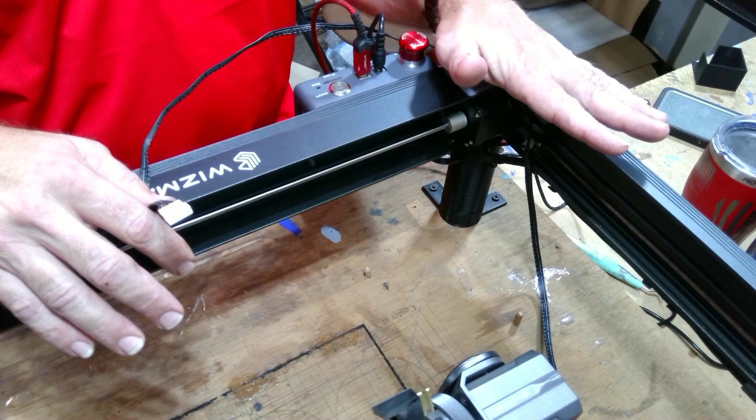Okay, so plugging in the rotary chuck is pretty simple with this. Here's our cord off of our rotary, it's got this plug on it. All we're gonna do is this little stepper motor right here - down in the bottom of that is the power plug for that. We're just gonna unplug that, and then we're gonna go over here and plug our rotary into that. Now what'll happen is the laser module will go back and forth, and then the chuck will turn on the rotary, back and forth, however. So pretty easy, that's all there is as far as installing this thing. So let's move over to Lightburn and get all our settings in there and we'll get this thing going.

Okay, so this too is pretty simple, there's not a whole lot to this. So what I'm gonna do is, once I've got Lightburn open, I'm gonna come down here to my lasers and select the Wizmaker - that's the laser I want to use. Now, once that is selected, I'm going to come up to laser tools in the top left, right up here. I'm going to select laser tools and go to my rotary setup. So from here, you can choose either you're using a rotary roller or a rotary chuck. Since we're setting up our chuck, this is what we're going to do today.

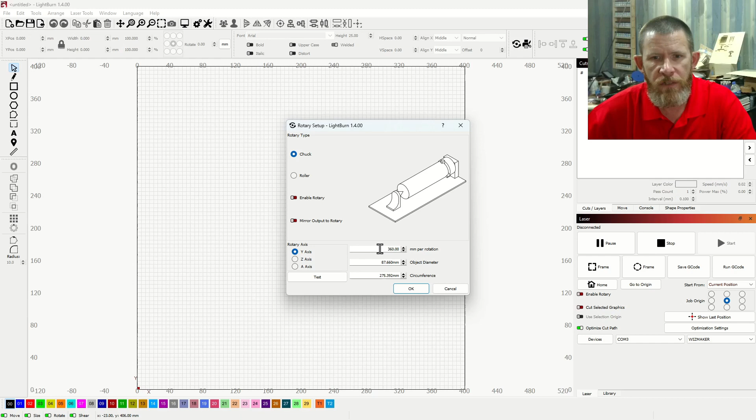So you'll see the default, at least in mine, when I go to set this up, my millimeters per rotation. This is the info you need that's going to tell Lightburn how much that rotary is going to turn to do one rotation. So 360 millimeters is what the default is when I open mine up. So what I did is I went in the book that came with the chuck and the rollers, and it told me that it was 160 - so the Wizmaker chuck is 160. All I'm going to do is type 160 in there, dot, and enter. Now I can bring that back up and it shows me 160 millimeters per rotation. So now the size of my chuck is all set and good to go.

The only other thing you're going to have to do when you're doing the chuck is you're going to have to tell Lightburn how big a diameter what your etching is.

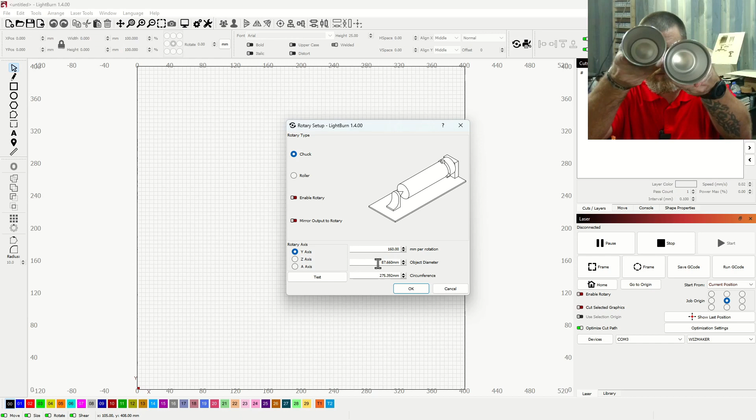So there's a difference. These two mugs - obviously the blue one is smaller than the red one, and it's shaped a little different. So the diameter on this is going to be smaller than this one. I want to make sure that anytime I'm burning or etching one, I put the right diameter in for that mug. And if I switch to a different one, I've got to remember to switch that diameter too.

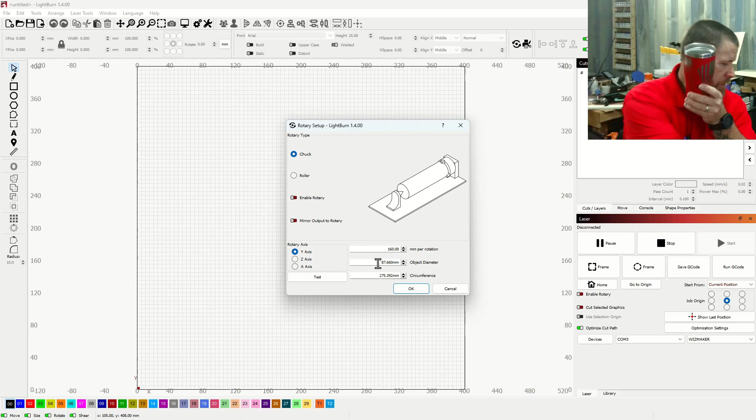So what I'm going to do is take this mug and a set of digital calipers. They don't have to be digital - if you don't have digital, regular ones will do. I just like digital because I use these for work.

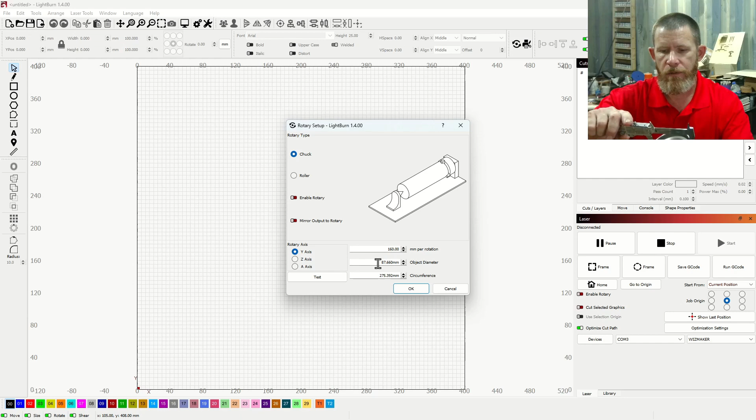I'm going to measure the widest distance on this tumbler, which tells me what to go around. It's tight right there. 87.43 is what I'm getting. So that's what I need to put right here - 87.43.

Now that's set. I don't need to worry about circumference, because once I put the diameter in there, it automatically changes the circumference.

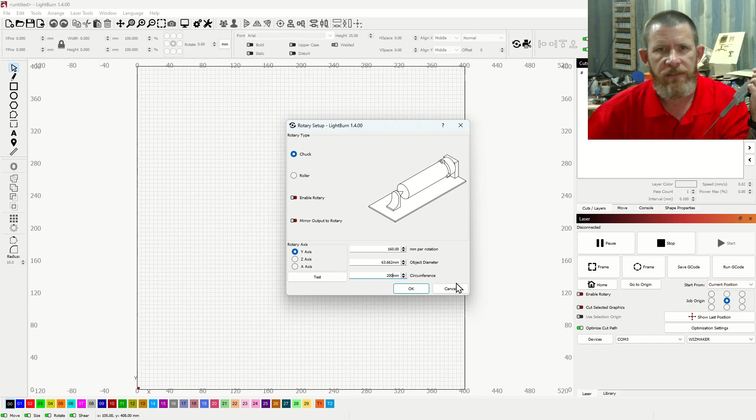I'm going to copy that setting with Control C. If you watch the circumference down here, if I change this to 100, it automatically changes the circumference - so you don't have to set both, just one or the other. Vice versa, if I know the circumference is 200, that tells me 63.662 millimeters is my diameter. So it does the math for you.

That's pretty simple. So I'm going to go back here and paste that setting back in, 87.43, and just hit OK.

So now it's set. But the only other thing you've got to look out for is if you have multiple lasers and you're going back and forth with different brands - say two X-Tool D1 10-watts, you don't have to worry about this. But if you have an X-Tool and a Wizmaker, or a Wizmaker and a laser tree, now you've got to go in on Lightburn.

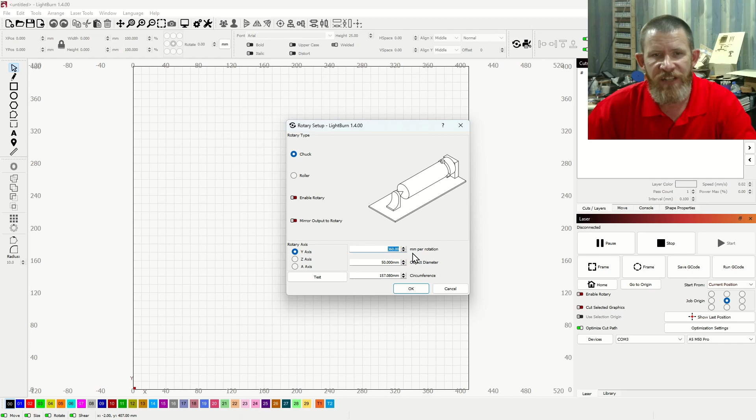You can see down here where I have Wizmaker selected in the bottom right - you see I have other lasers in this one. So if I go to my A5 M50 Pro, now I go back up to laser tools and go to rotary setup - see there, 360. It doesn't change it for every laser. So if you're going to use this on different lasers, you need to go into each laser and set that 160 millimeters per rotation and click enter.

That's it, that's done. Now the only thing you've got to do is go in and change the diameter or the circumference, whichever one you want. So that's it - it's completely set up.

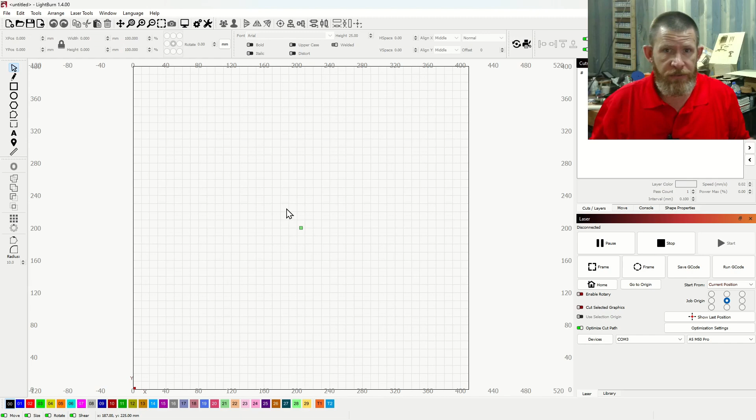So that's the difference. If you don't have it set up properly, and you put in a picture or words, they're all going to come out looking really goofy, and you're going to waste a tumbler. So anyway, that's how you set that up.

So let's move over to the laser. We're going to fire this thing off and do a speed power test with air and without air on a blue and a red tumbler. Then we're going to etch a flag into a blue and a red tumbler, clean those up, and see what it looks like. It's pretty simple. Stick around.

Okay, so I'm not going to bore you guys with a bunch of video of doing speed and power tests - everybody should know how to do that. If you haven't, I have videos on running speed and power tests, but there's no sense running a bunch of video on that. So we're going to get right to it.

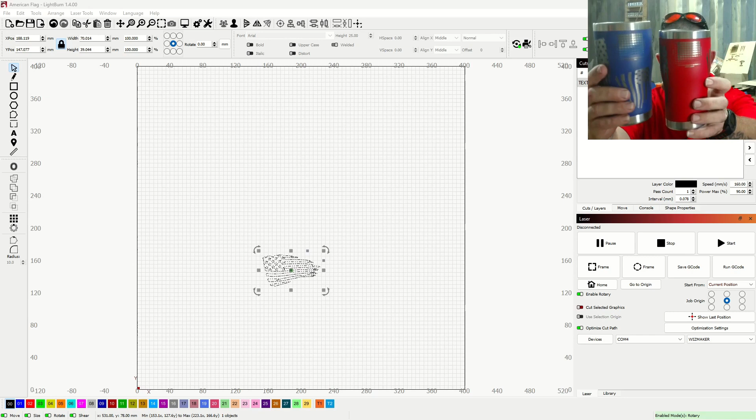So you can see here, I ran my red and blue tumblers - I've done speed and power tests with and without air. And then what I did is I went through and just did a little flag. Okay.

So there we go, pretty simple, not a whole lot to it. I did red and blue, got different speeds and powers between them, but that's the whole purpose of running the speed and power test. They both clean up pretty easy, just a little bit of scrubbing with the melamine sponge. You don't need a bunch of fancy chemicals. Water, melamine sponge, and Bob's your uncle, you're all done.

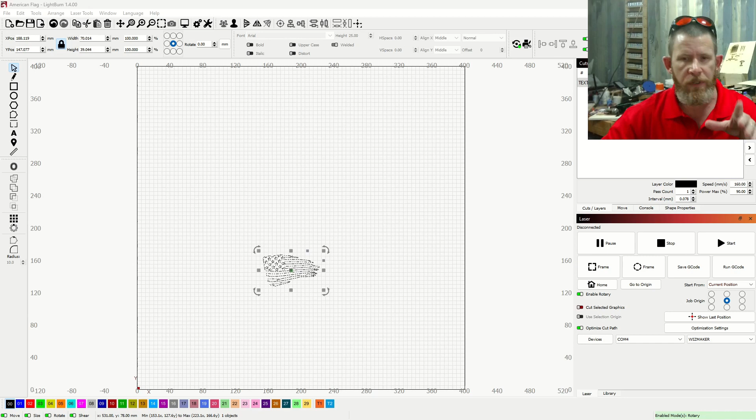So here's what we're going to do. I want to take another tumbler, just a bare one. Now what I want to do is put that flag on both sides, but when I'm drinking out of it, I want the flag to be in the proper position no matter which way you're looking at it. So if I do it this way and go to drink out of it, the flag's upside down. I was just trying to burn it, wasn't trying to do this - this is not a finished product, this is a test piece.

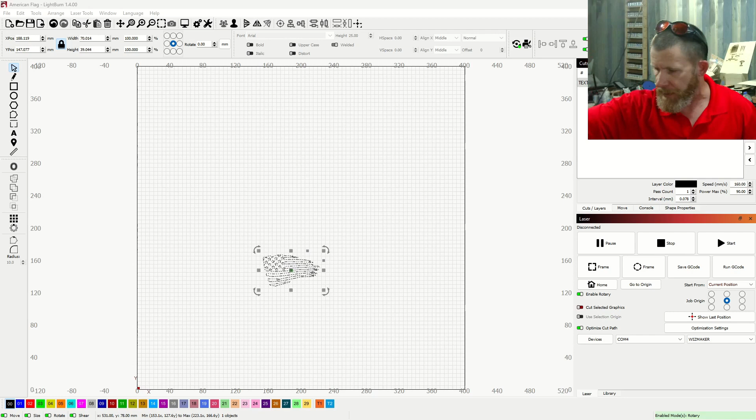So now what I want to do is make a couple of rectangles inside of LightBurn, and then put my flags in there. The purpose of doing those rectangles is one is going to be one half of the mug, and the other rectangle is going to be the other half of the mug. So here's how I'm going to find that out.

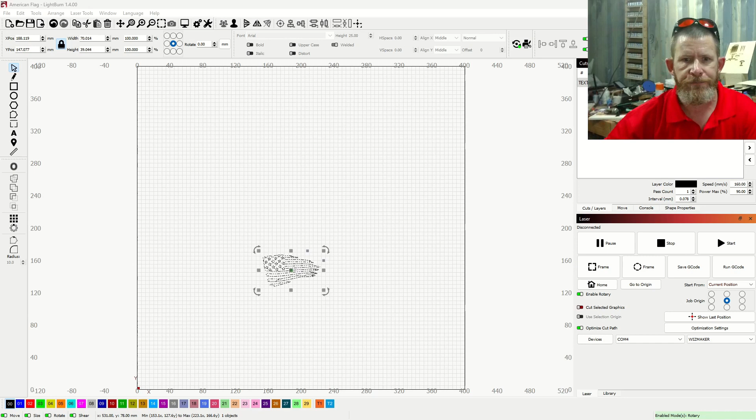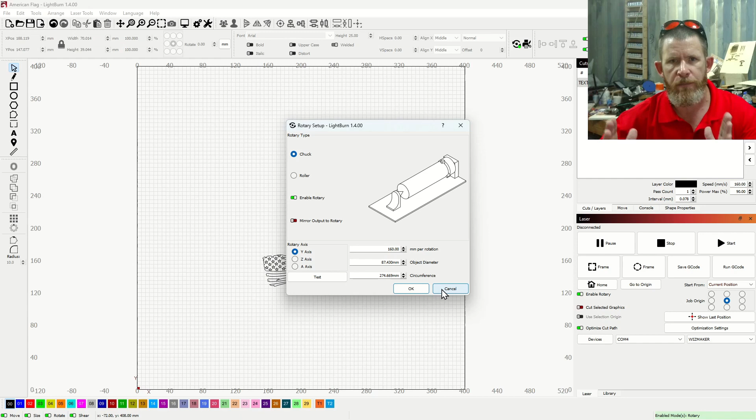So what I did is I went back up to laser tools and went to rotary setup. I looked down here at the circumference: 274.669 millimeters. Basically what I did is round that 0.669 up to 670, which isn't going to make much of a difference, so I used 274.67 millimeters. Then I divided that in half and got 137.335 millimeters - that's the width I want for two rectangles.

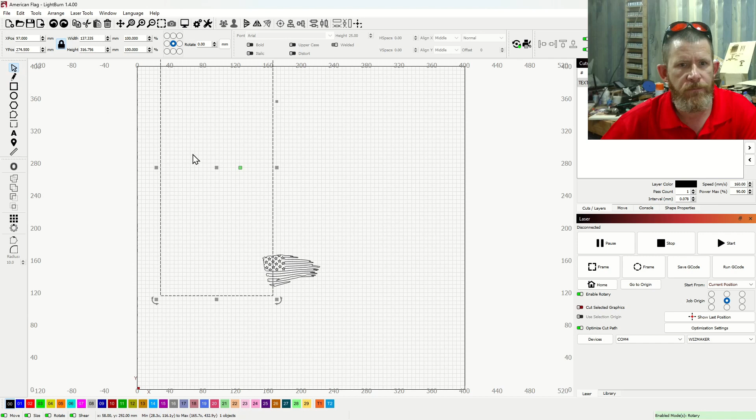So I've got this information, I'm just going to hit cancel and come up here and draw a rectangle. My width I want to be 137.335. Enter. Okay, now it's a little big but that's okay because we're going to adjust that. Whoops, Control Z to undo that. So I'm going to drag this down a little bit.

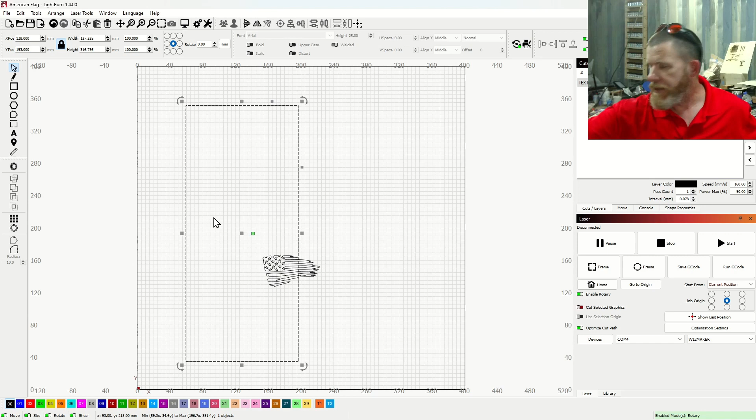Now what I want to do is measure the coated area on my tumbler. I'm going to grab my ruler - 142. I really like the flag that I did earlier and it's about 120, so that's what we're going to do - we're going to make this 142. I'm going to unlock and my height is going to be 142.0. Enter.

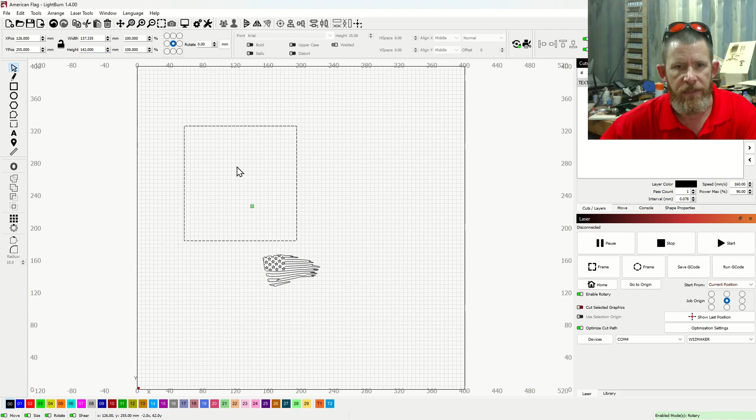Now I'm going to take that, hit Control C, copy it, and then paste it. Whoops, Control C, Control V. There we go.

You can do this with Array if you want as well, and sometimes it's better because my mouse is a little touchy - if I hit the arrow it moves over way too much. But that's okay, I'm aligned down here on the bottom. This little tiny 0.001 millimeter section is not going to bother me a whole lot.

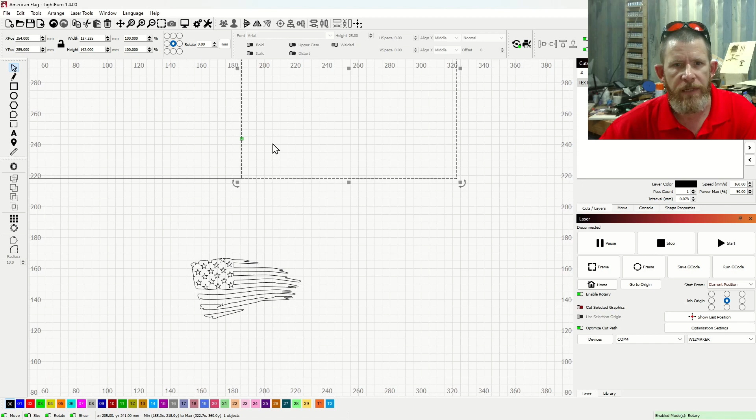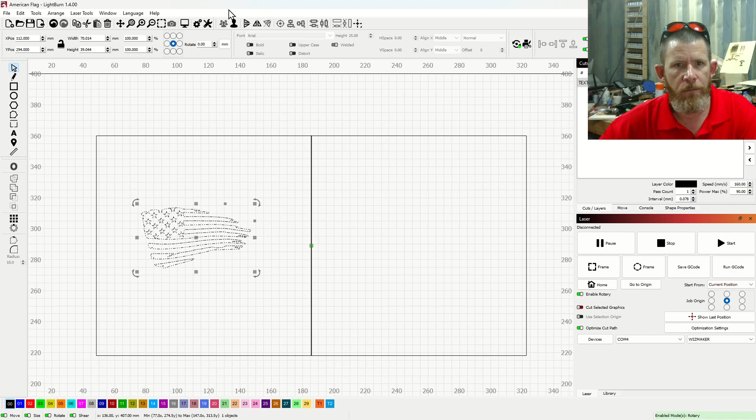Now what I want to do is take this flag and bring it up here. Now what I'm going to do here is rotate that 90 degrees.

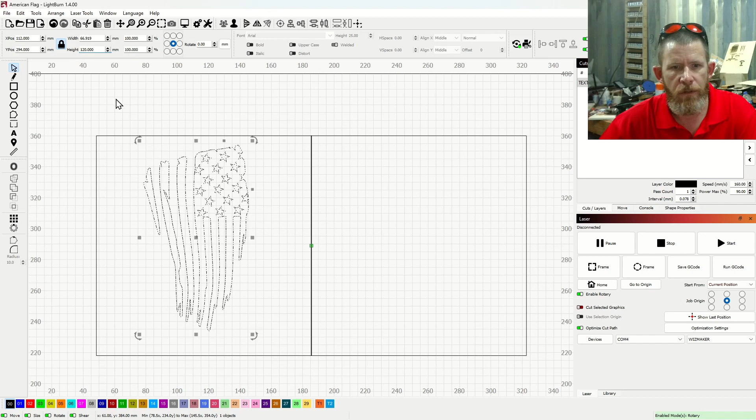So that's going to be one side of the cup. And I'm going to lock the height on this - my height on the other cup I did was the right size, the size I want was 120 millimeters. So right there. Now what I'm going to do is take these and align that vertically, and I want to align it horizontally - that way I know it's in the center.

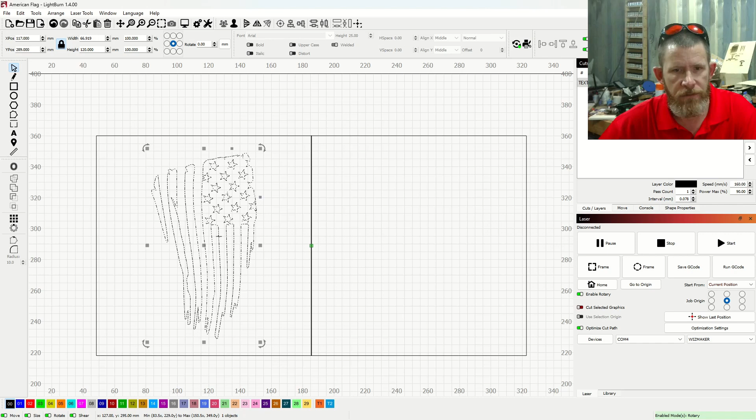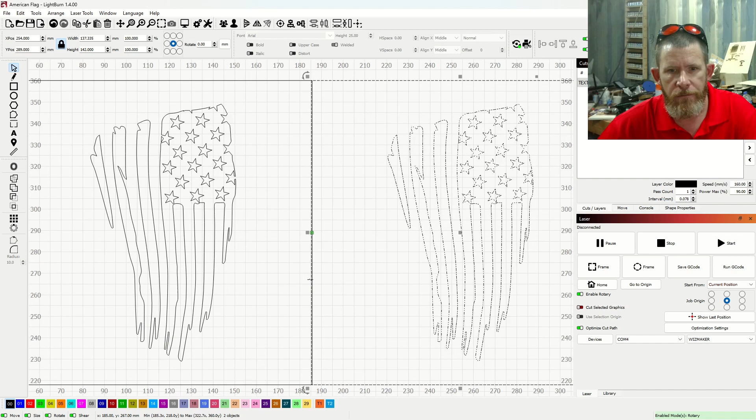Then I can take that, Control C that, come over and Control V that. Same thing, I'm going to align vertically, and then align horizontally. Now that brought the whole thing up, but it's done on that flag, so I'm just going to drag it back down here a little bit. We'll zoom in - my vertical is good, I still have that tiny little overlap.

Like I said, the array function is probably best to do this just to make two squares. But now what I want to do is take that flag - accidentally moved it - and I'm going to rotate that one minus 90.

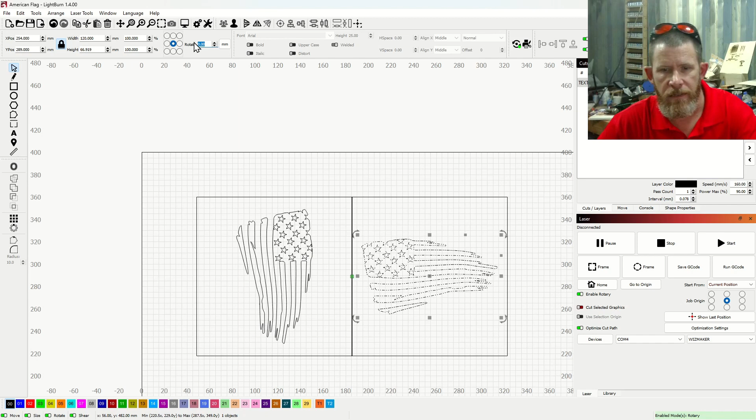And again, minus 90. Could have just done minus 180. So now that flag should be... well, it's on the bottom.

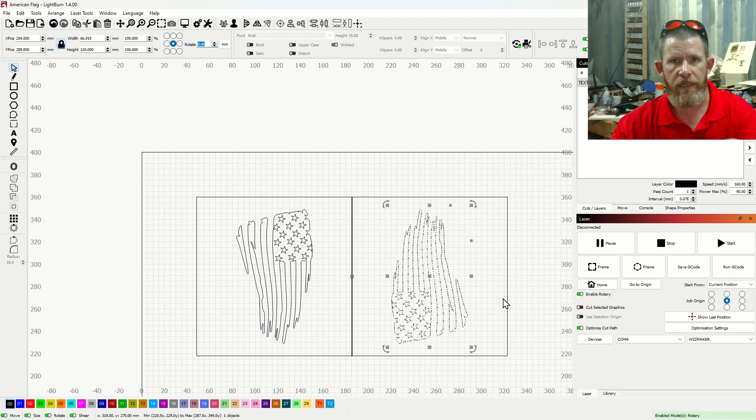Yep, all right, so now we're good to go. So now what I'm going to do is move over here and put a mug or a tumbler inside of the rotary chuck. I'm going to show you guys how I level it, because obviously these are tapered. As you can tell, it's fatter on the top than on the bottom.

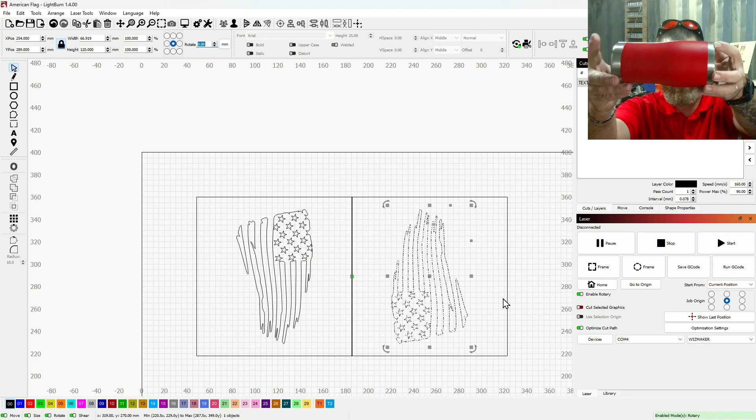So they got a little bevel to them, and what I want to do is split the difference. So when I put it in the rotary chuck, I want the ends to be about at the same height, and I'm going to split the difference on that. So I'll end up doing my focus here. Let's move over and get that set up and get this thing burnt.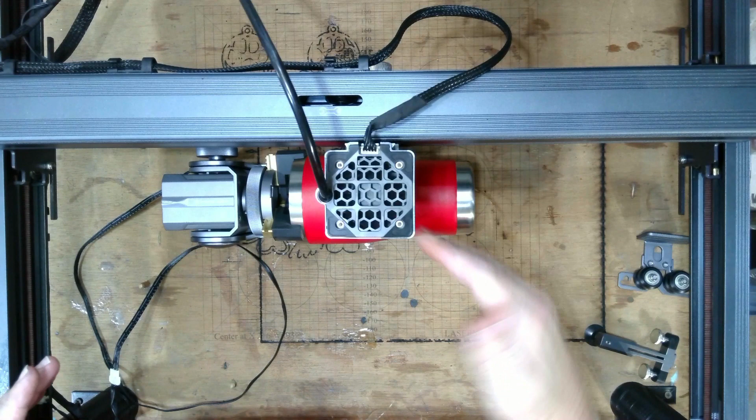Then I just want to make sure again that I'm squared up. Then I'm going to pull my laser over. Now I've taken my protective lens cover off because I always wear my glasses when I'm doing the laser stuff, and it makes it easier.

I just 3D printed this little box - there's nothing to it, it's not the greatest design, but it works, and I'll figure something else out. But what I do is I just go in and set that right there.

Now I know I'm going to drop that down just a little bit. Now it's sitting on top of there. I'll slide that back off, slide it out, and now my laser focus is set. Then I'm just going to look at it from the side, make sure I'm at the apex or at the top of the mug. All right, so now we're going to go ahead and turn the power on.

Now what I've got to do is make sure that I am centered. So I don't want to do those squares that I made, the rectangles, so I'm going to delete those real quick. I'm going to delete that one. I'm going to delete that one.

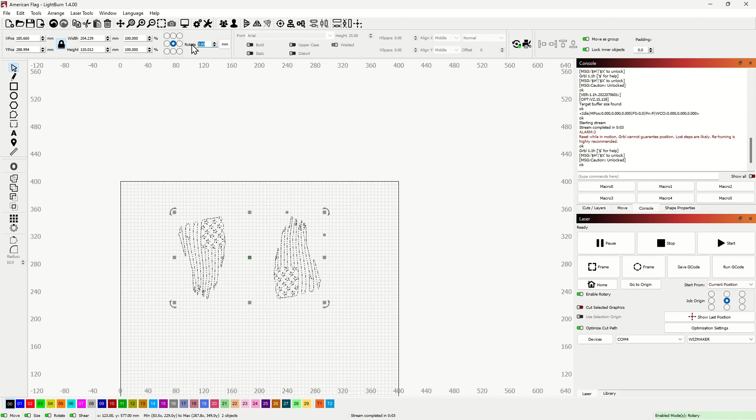Okay, so I'm a dummy. You'll see what's happened here on my flags - I rotated the one flag, but the problem is I'm doing a tumbler, which is this way, so I forgot to actually rotate both of those. So what I've got to do - see up here, I'm a big dummy - so now I'm just going to, if I go minus 90... and that is right. Okay, now we're good.

Now let's try and frame that again. Let's turn that off. That looks to be pretty center. Inches - so 142, so I want about 71. That looks pretty close, so let's go ahead.

Now we'll frame that again the right way this time. And it looks like I have got the same empty space on the bottom as I do towards the top end, so I think we're good. So let's go ahead and get this thing burned.

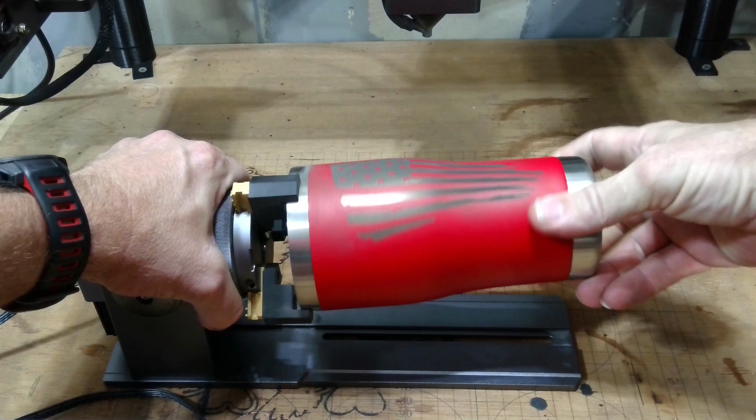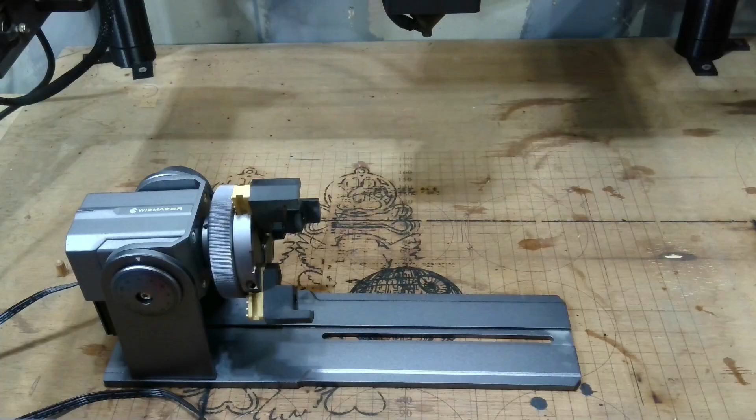Okay, so we're all done. Now all we got to do is take our mug or tumbler and get it cleaned off. So as you can see, if I'm drinking from this side, because I'm right-handed, the flag's in the right position both directions. So that was the whole reason I wanted to do it that way, for no other reason.

Now, the only thing I did do, so usually when I remember to turn on my air assist, I'm pretty proud of myself, because a lot of times I forget, and I don't know why. I've ruined a bunch of stuff. I guess I just blame it on old man memory, I guess.

So I actually remember to turn my air assist on for this, but what I did not pay attention to is that when I put the flags in there, I had the speed and power settings for my blue tumbler, which are higher and faster than what I did my original red tumbler at. So we're going to clean this off and see how it looks. Hopefully I didn't screw it up too bad, because I'd like to have these mugs to sell or something if it turns out. So anyway, that's our mug, our tumbler.

All I'm going to do is take a melamine sponge. I'm not going to use bartender's friend or barkeeper's friend or any of that expensive stuff. None of that crap. All I have is a jug of water, melamine sponge, and I'm going to take that tumbler and just clean it off.